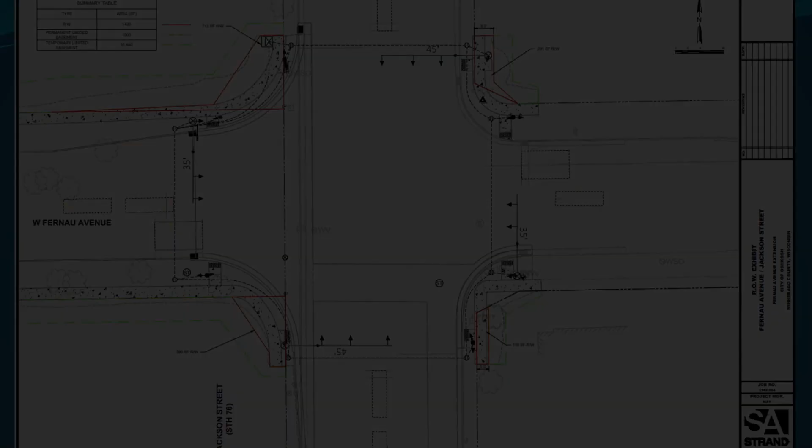It's just a schematic drawing of the proposed acquisitions outlined in red. The proposed land acquisitions vary in shape and size.

Ranging from 118 square feet at the southeast corner to 713 square feet at the northwest corner.

Additional right-of-way on the east side of Jackson was acquired in 1996 by the DOT for the Jackson Street repaving project.

This one. The proposed acquisitions on the east side, this land is currently located within the city of Oshkosh, while on the west side, these tracts of land are currently located in the town of Oshkosh.

After the acquisition process is complete, these two corners, as well as the remainder of Fernau Avenue, will be annexed into the city and then followed by official dedication to the public through a certified survey map.

This review and subsequent approval by Common Council is the first step for the city to acquire these properties, and the city is required to follow the acquisition process as required by state statute.

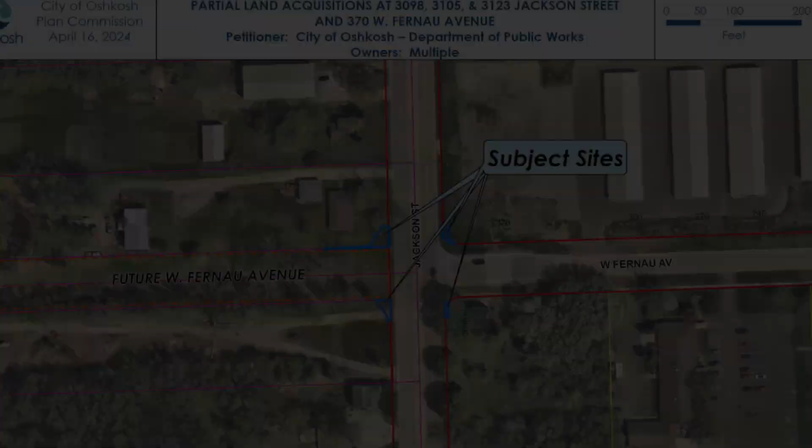With that, staff is recommending approval of the partial property acquisitions as requested.

Thank you for your report. Plan Commission, any technical questions for the staff?

Still working through the process with the Department of Transportation. I do believe it'll be signalized, but we're still working through the exact details of what it's going to look like. The only question is whether a roundabout option would require more dedication. We haven't looked at that, and it probably will not be a roundabout.

Any other technical questions for the staff from the Plan Commission? Okay, I'm seeing none.

We will have public comment on this. We have had a statement from the applicant, so is there any member from the public that wishes to speak on this agenda item? Please approach the podium and state your name and address for the record.

Jared Van Landen, W6813 Melanie Court, Greenville, Wisconsin. I'm the property owner on the northeast corner, and I did receive the letter. My question is related to sidewalks and the pedestrian traffic that's going to take place. I apologize, I'm a few minutes late. I wonder, is there some insight as to what the sidewalk situation and crossing pattern is going to look like on that corner?

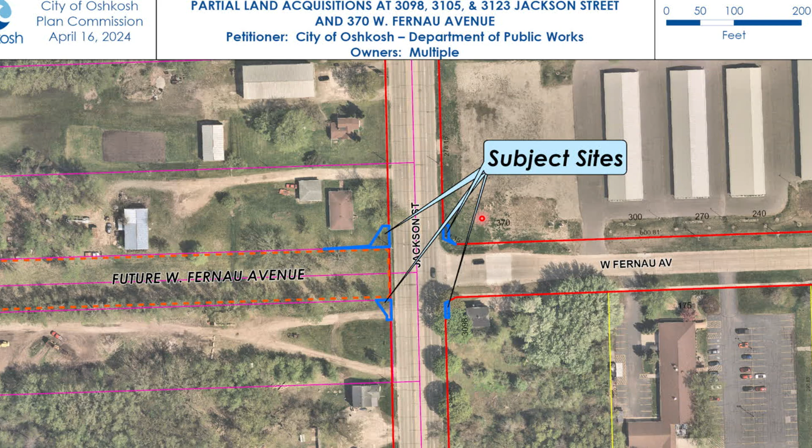Plans are still being developed, still working with the DOT to get the exact requirements. But big picture, we're looking at having crossings in all four directions - north and south side of Fernau going east-west, and east and west side of Jackson going north-south. There'll be handicap ramps at all four corners with pedestrian push buttons for signals and walking. Currently there is no sidewalk on the north side of Fernau Avenue. The south side has sidewalk, which connects to the rest of the sidewalk connectivity throughout the city on Main Street. At some point, though not necessarily with this project, I'd expect sidewalk installed on the north side of Fernau, but that is not part of this project.

So essentially, the connection points that are part of the street project - the sidewalk ramps and stuff - are what would be installed, not sidewalk connections on other properties.

Thank you. Is there any other member of the public that wishes to speak on this agenda item? All right, I'm seeing none, so I'm going to close the public comment period.

We don't need a closing statement from the applicant, so Plan Commission, the action is upon you. Motion to adopt the findings and recommendation as stated in the staff report. Second. We have a motion and a second. Is there any discussion on this motion? So I'm seeing none. Let's have a roll call vote, please.

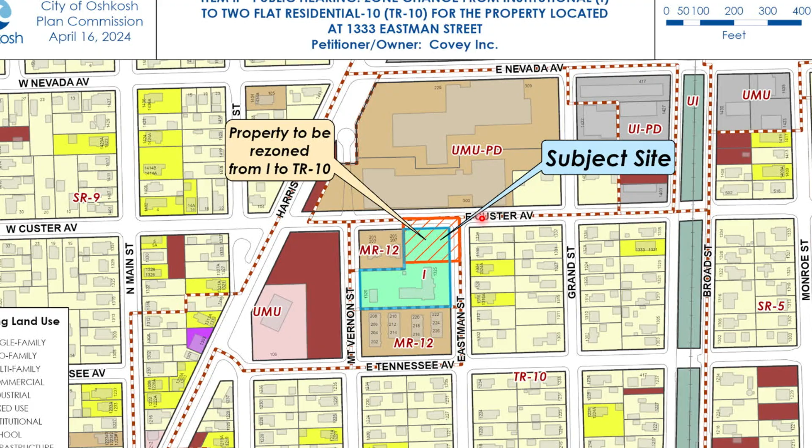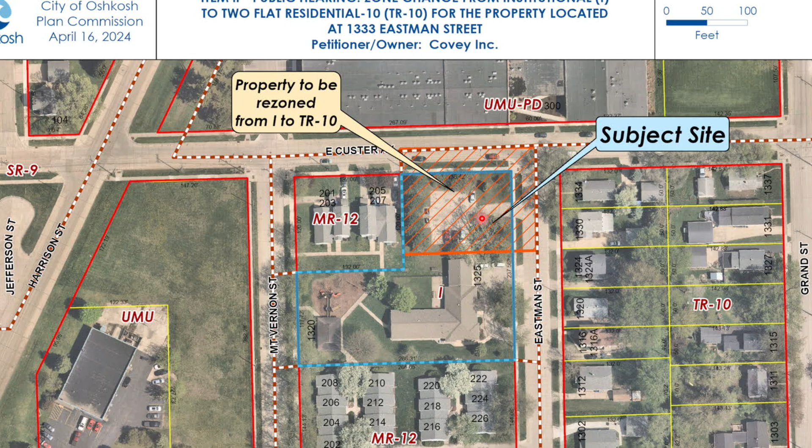Here is a site plan. For this reason, staff is supportive of the proposed rezoning of the subject site, and staff recommends approval of the zone change with the findings listed in the staff report.

Wonderful, thank you for your report. Plan Commission, any technical questions to staff on this item? Okay, I'm seeing none, so this is a public hearing.

I will open the public hearing and ask the applicant to make an opening statement. Is the applicant here tonight? Yes. Please approach the podium and state your name and address for our records. My name is Tony Gonzalez. Our address for Covey is 2200 Algoma Boulevard in Oshkosh.

Thank you for the opportunity to talk with you about our proposal today. I am the Chief Operating Officer of Covey Incorporated. As was mentioned, we are both a residential and community-based service provider for people with disabilities in Winnebago and Outagamie counties. The request is for us to change the zoning, which will allow us to build an approximately 2,000 square foot ranch home at the corner of 1333 Eastman Street that will serve as a licensed adult family home, again, for 4 individuals.

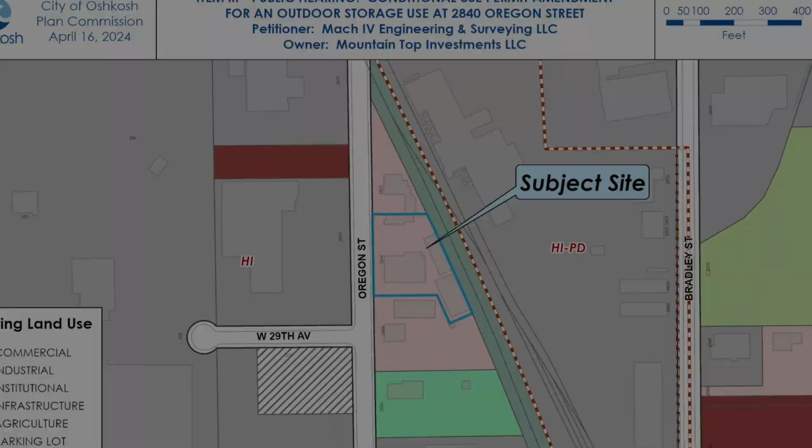So the subject site is located on Oregon Street, north of West 29th Avenue, and it is used for warehousing purposes, and it is zoned heavy industrial districts and surrounded by primarily industrial uses. In December of last year, Common Council approved a conditional use permit for removal of the roof from the Quonset hut style building for outdoor storage of pallets within the remaining walls of that building.

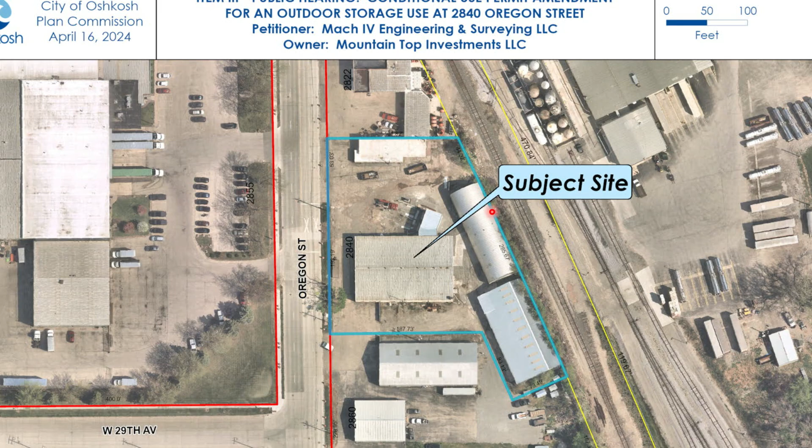The applicant has revised their plans; they are no longer removing the Quonset hut building roof, and they would now like to store their pallets in existing paved areas of the site, shown around here. They will be screening those pallets with 8-foot tall solid fencing on the street side of the storage area to meet code requirements for screening from non-industrialized areas. It does require a conditional use permit amendment as they are no longer using the Quonset hut style building as the outdoor storage, so that has changed.

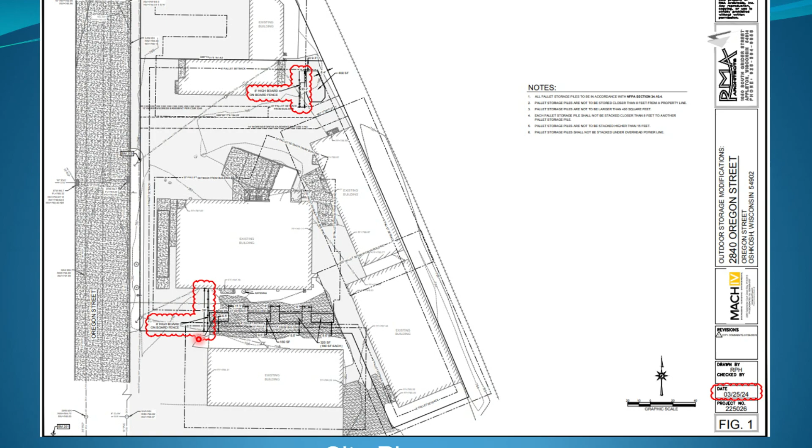Staff does not have concerns with the proposed CUP amendments as the proposed outdoor storage area will meet current screening requirements with the 8-foot tall solid fencing buffering it from the public right of way. So with that, staff recommends approval of the proposed CUP amendment with the findings in your staff report. Thank you for your report. Plan Commission, are there any technical questions for the staff?

Any technical questions for the staff? All right, I'm seeing none. This is a public hearing, so I will open the public hearing and ask if the applicant is here and would like to make a statement. Is the applicant here? Yes.

Approach the podium and state your name and address for our records, please. Joel Airforth, Mach IV Engineering. Just be available for any questions. I think staff did a nice job of summarizing what we're proposing.

Wonderful, thank you. Any member of the public wish to speak on this agenda item? The public hearing is open to any member of the public that wishes to speak on this agenda item. Any member wish to speak? Okay, I'm seeing none, so I'm going to close the public hearing.

We don't need a closing statement from the applicant, so Plan Commission, the action is upon you. Motion to adopt the findings and recommendations as stated in the staff report. Second. Okay, we have a motion and a second. Is there any discussion on the motion?

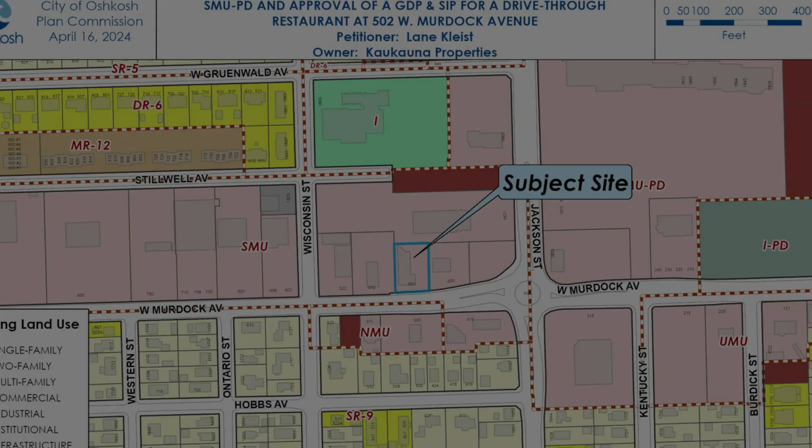The subject site is a third of an acre in size, located on the north side of West Murdock Avenue, west of Jackson Street. It is zoned suburban mixed-use district and has an existing car wash building. Here's a view of the subject site.

The applicant is requesting a zone change from SMU to SMU PD, and they're requesting that planned development overlay to allow for flexibility in the zoning ordinance to accommodate a new use on the property, and they have submitted plans for a drive-through restaurant.

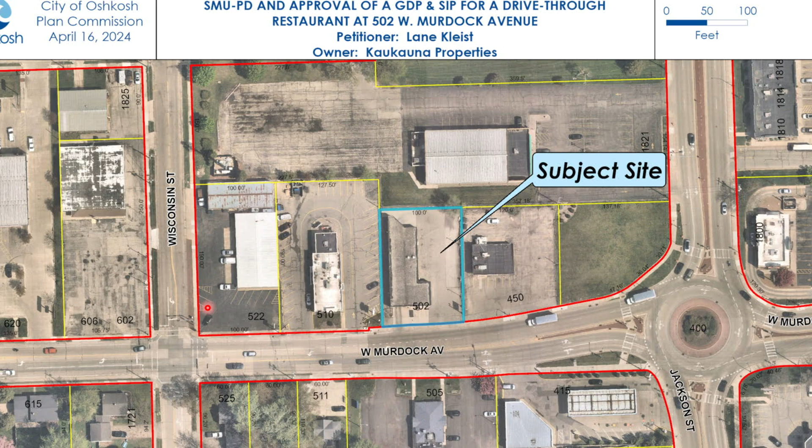The rezone would accommodate redevelopment of the site due to site constraints related to the minimal size of the lot. Staff is supportive of the proposed rezone as it will serve to accommodate future development needs for the site. There was a Plan Commission workshop held in February of this year with the concept plans, and Plan Commission voiced support for those plans.

The applicant is requesting a BSM for reduced front yard setback for the pavement to 17 feet, where code requires a 25-foot setback, and staff is supportive of that BSM due to the limited area on the site to meet setbacks as well as all other code-required parking and building areas.

The applicant is also requesting a BSM to allow increased impervious surface ratio to 79%, where code allows a maximum impervious surface of 70%. Staff is also supportive of the increased impervious surface ratio, again due to the relatively small size of the lot and fitting all the needed amenities. Also, it is a significant improvement from the existing impervious surface ratio on the site of 100%.

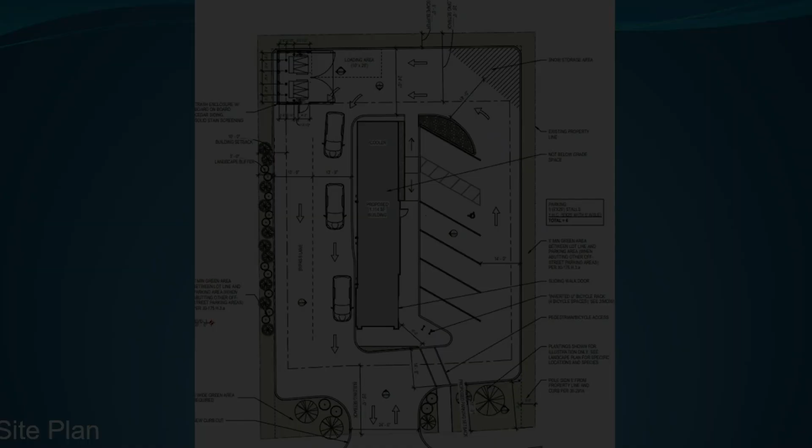The applicant has submitted signage plans, including wall signage on the front and sides, which appear to meet code requirements. They're also proposing a new monument or pylon sign, which would be 22 feet tall, with a 17-foot setback from the front property line and a 5-foot setback from the side property line. The proposed size is about 47 square feet, well under the maximum of 100 square feet based on the linear footage of the front property.

The applicant is requesting BSMs for reduced front yard setback to 17 feet and side yard setback to 5 feet. Staff is supportive of the requested BSMs, as these setbacks will match the front and side pavement setbacks and will prevent obstruction of the drive lane. Also, the sign height is well under the maximum height of 30 feet for the SMU district, and the sign area is less than half of the ground sign area allowance, so that serves to offset the BSM request for reduced setbacks.

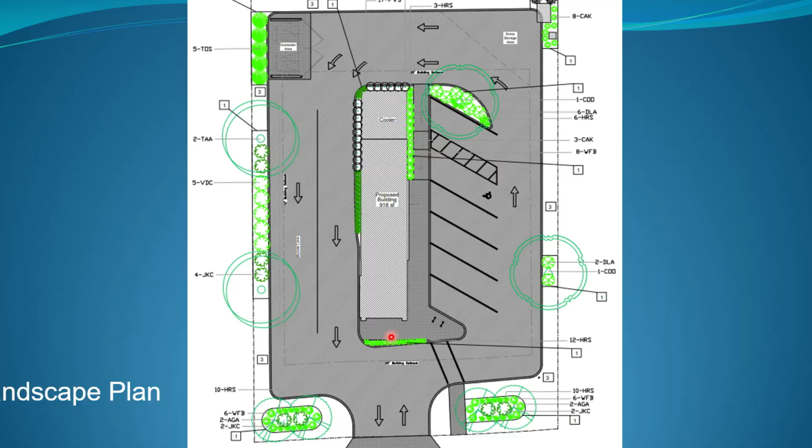Here are the proposed building elevations. They are exceeding the Class 1 material requirements on the front and side facades, and they are requesting a BSM for the rear side facades for a Class 4 material, which would be vinyl wrap over that exterior. Here's an example. Domino's has used vinyl wrap on their exterior coolers, and they typically have a material print, like this one shown, kind of like brick, with artwork on the wrap. Any artwork on the vinyl wrap will be subject to the city's mural ordinance.

Staff is supportive of the requested BSM for Class 4 material, the vinyl wrap on those side facades, as they are towards the rear of the building and minimally visible from the public right-of-way, and they are also providing increased Class 1 materials to offset that request.

So the applicant is requesting base standard modifications for reduced ground sign and pavement setbacks, increased impervious surface ratio, and allowance of a prohibited exterior material. To compensate, the applicant is providing 126% of the required landscaping points, reduced ground sign area, and exceeding the Class 1 material requirement. So staff feels that the applicant has sufficiently offset the BSM requests.

One thing to note is the list of conditions did not include a BSM request for the Class 4 material in your staff report. I intended to have that in there but did not, so my apologies for that. But we are adding that as a sixth condition to allow the Class 4 materials on the side facades.

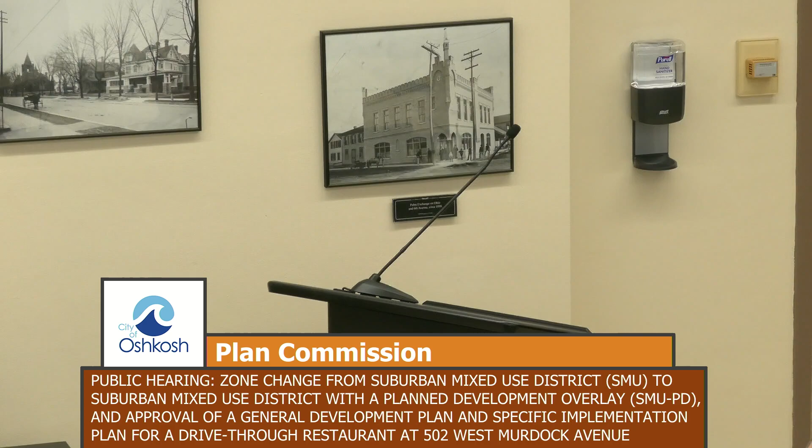Since there were no statements, we don't need a closing statement from the applicant, or do we? No, but I have one comment I want to make. We have a comment from the planning director. Because we forgot to list condition 6 here, based on item number 6, I would ask when you make the motion, instead of just the normal plus condition 6 as noted, make sure we formally get it added to the record before it goes to council.

All right, so we have that part of it done, so commission, the action is upon you. Motion to adopt the findings and recommendations, including number 6, as are listed in the staff report. Second. Thank you. Okay, we have a motion and a second. Is there any discussion on the motion?

Ms. Shireman? My question is about those vinyl wraps. Generally speaking, I'm okay with them. I like signage very, very much. But I'm interested, because it's in the back and around, you're okay with it. When does that become something you're not comfortable with?

The mural ordinance allows them on any side or rear facade under the current code, and just prohibits them on the front. As long as it meets those standards, they are by right allowed. So if you have a property that's on the corner, wherever the address is, that's the front. Correct. Even though it's the side. Correct. If you're on the corner, the side street can have a mural on it. Yeah. Yep. Okay.

So why is it that, I know it was forgotten, but isn't it an exception for you? So the way the zoning code works, it's not the mural, it's the material that lies underneath. Typically, we would recommend to you not to use Class 4 materials. They're prohibited in the code. However, in this instance, with the fact that they're going to wrap it, you, I, or no one else is going to know what's underneath it, so it makes sense to allow the base standard, but we still have to address the underlying code requirement, which is what the base standard does. Got it. That's it. Thank you.